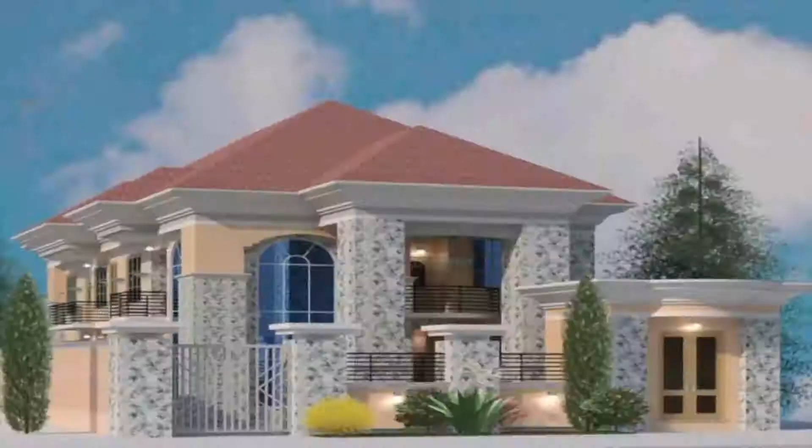Those of the last 3 weeks were rooted by strong winds. Research has also shown that 65% of building collapses occur during the rainy season. Today on the Nigeria Property Show, we will be talking about the need to build right with regular maintenance to prevent building collapses.

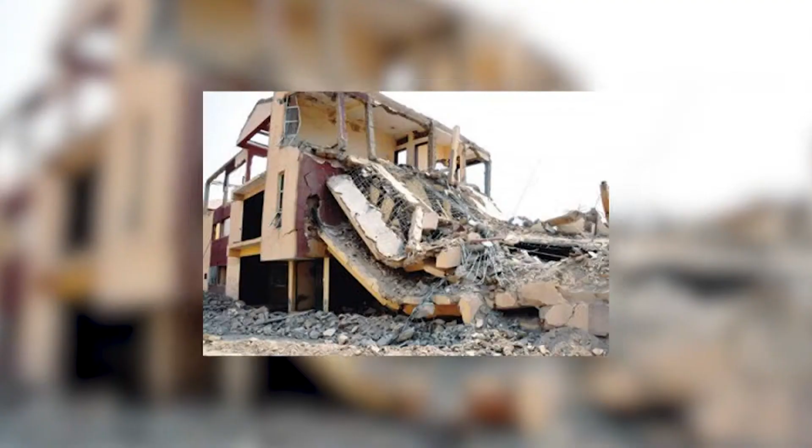Tell us, what should we know when we say we're building right? The collapses witnessed in the past came on during the rains, during the rainy season, and that's what has informed the topic we're treating on the experts on today's program. We're looking at building right towards preventing collapses. What should we do? What should the public know about building right?

You know, the process of procuring a building: you meet with the surveyor. The surveyor gets you your survey document. That introduces the first step. The second step is you go to, if it's a very small property, your architect. If it's large, maybe you want to develop a town or an estate, you go to a town planner to put the layout right.

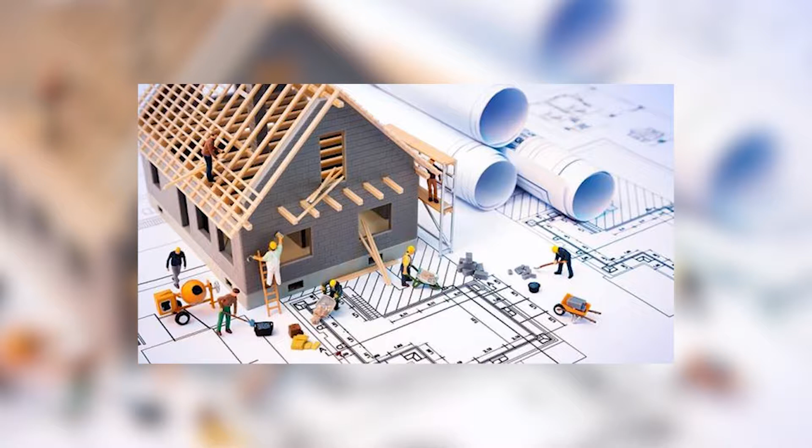The architect now puts the design together for you as it should be. It takes care of the environment, the topography, your needs, your comfort indices, and a lot of things that you need to put together to make that building right for you. It's like when you want to buy a dress, you take it to a tailor to put together for you. But the architect is properly trained in being able to put that building together for you.

Next, the design? The design, yes. Next, the structural drawings are done, like the skeleton of a human being. The engineering of the human system cannot stand without the skeleton. So you need the reinforcement details of the concrete structures and the concrete mixes and whatever to put that design together so that it can stand.

Then a builder builds. And from there, of course, the quantity surveyor will put the cost together. Then your building is right for the market, and the estate value is right for the market.

You said the quantity surveyor will put the cost together, the cost of building materials and all that will go into the building. Then the builder builds, and once the building is finally prepared, it's ready for the market, where the estate valuer puts it on the market.

Where does the soil test come in? What's the significance of the soil test in building right? There's a particular branch of engineering called geotechnical engineering. Geotechnical engineering is where they go into the soil to determine the soil type, what kind of foundation can be used in that soil, to know the bearing capacity of the soil, such that when we put that building there, it will not fail. So it will guide the engineer to know the kind of reinforcement to put in place.

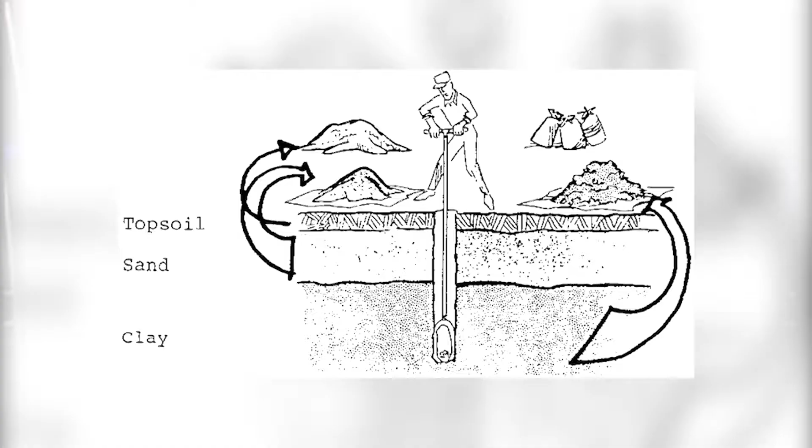What does that soil test have to do with the lifespan of that building, to prevent a collapse in future? Well, there are different kinds of soils. You have the loamy soil, the clay soil, and so on. So the geotechnical engineer examines the soil using a couple of equipments to determine what kind of foundation will be right for that place.

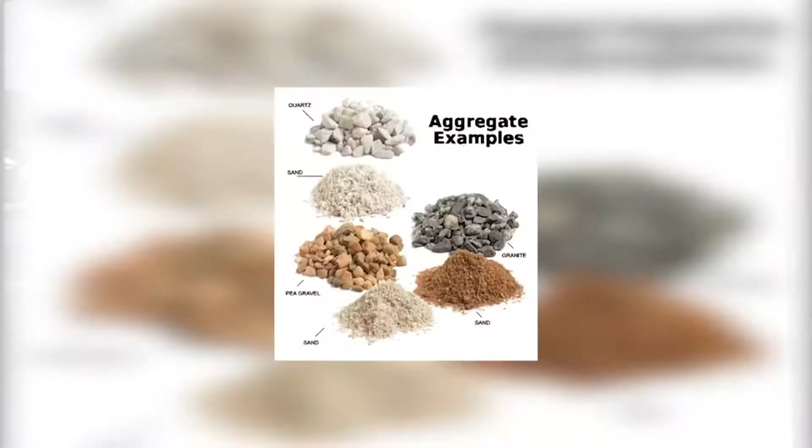This, the structural engineer uses to prepare his calculations and determine the amount of reinforcement, the quality of the reinforcement, the various sizes, and the consistency of the concrete that he has to put in place to form the reinforced concrete, and the blocks where the infill panels will be, where the load-bearing beams or columns will be. So that is the work of the geotechnical engineer, advisory to the structural engineer.

You've taken us through the stages of getting the building on ground. How about maintenance? What has maintenance got to do with preventing building collapses? Well, we hear that every building has its own lifespan. Definitely, there's none that doesn't have an expiry date. Even human beings, we have an expiry date.

But you can keep yourself from expiring early if you maintain properly. So you can keep that building from expiring if you maintain the building properly. Basically, once every 6 months you paint your building.

That's maintenance, so cobwebs will not stand, ants, molds, and whatever will not grow. Grasses that are grasses today can end up becoming trees in 5-10 years if you don't cut them, and the roots of big trees can end up uprooting your foundation. So you have to maintain the environment, you have to maintain the building.

Once in a while, check your roof. Make sure that your roof has cavities, cavities that will not allow pressure to build, because if pressure builds... What does that mean, cavities in the roof?

When you put a roof together on a house, you have to allow air to escape, so you create openings for the air to escape. Otherwise, when there is turbulence, high wind, the tendency is for the pressure to build inside that roof, and before you know what is happening, that roof has lifted off. That's what causes all these roofs to shift.

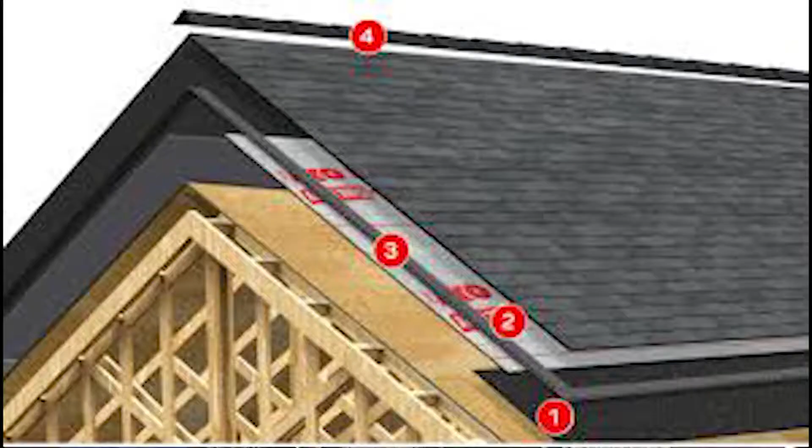Then you have the ones that create turbulence, the ones that follow windy storms, high winds, thunderstorms, and all kinds of rainfall patterns require different kinds of treatment.

The normal driving rain that is coming at an angle may enter your building if your window is not properly done. So your window has to have a window hood that takes into consideration the angle of the rainfall and the wind speed, such that the rain as it's coming in is covered by the rain hood and doesn't enter the house. Once it enters the house, it starts degenerating your structures.

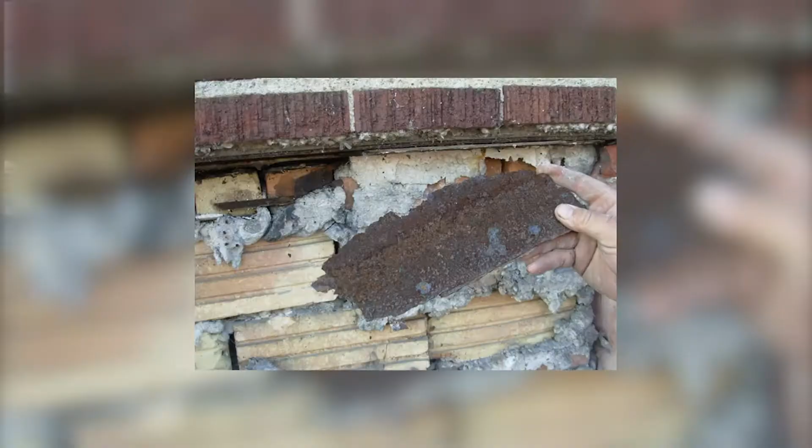Rain in the building can soak into structures and reinforcement begins to rust. So that is one area you have to make sure you take care of.

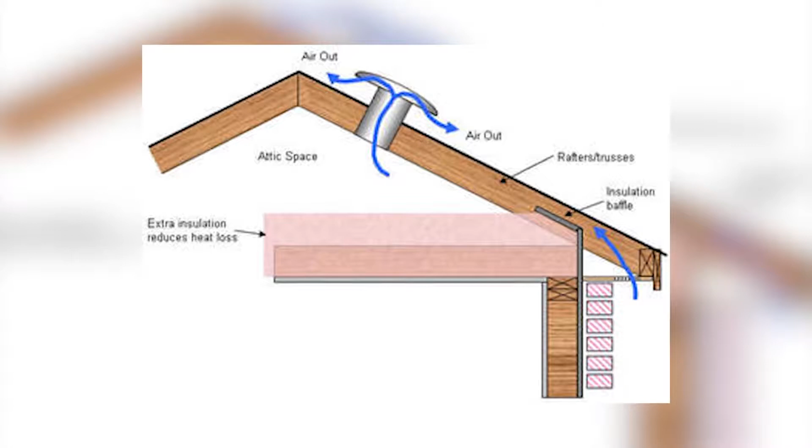As I said earlier, make sure that you create escapes in your roof so that it does not lift off, because if wind comes into your building, it builds pressure inside your roof, and the tendency is for the roof to lift off.

Most of these roofs that you've seen, like Moremi Hall Unilag, the roof got lifted off and landed somewhere in the school, as a result of something like that. So if the roofing structure is weak, the roof will cave in if there is heavy wind.

As the rains are coming now, make sure that your compound, if you see loose holes everywhere, make sure you seal them with maintenance concrete, so that the rain does not seep in.

Provision of housing is at the core of every government's goal. But in doing this, there is an urgent need for a paradigm shift, as done in developed countries, moving towards smart buildings for sustainable development, while pursuing safety for the environment.

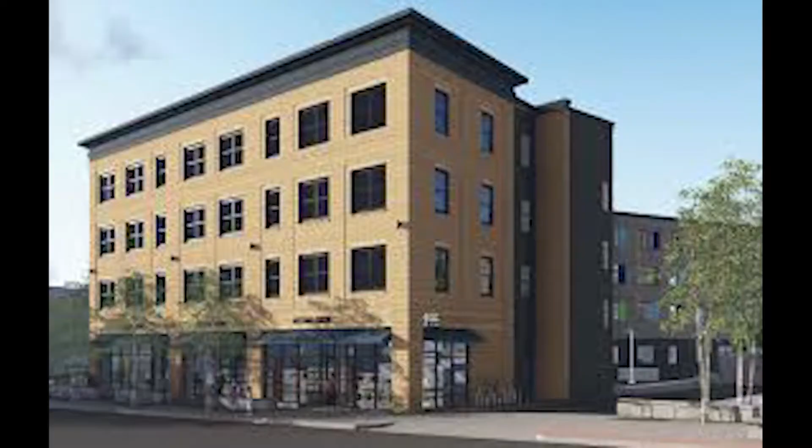Since cities are the future of the urban-built environment, with the increasing population demanding more functionality, the need for smart buildings is long overdue in Nigeria. Nigeria can do that by investing in alternative construction methods.

And in renewable energy alternatives for powering smart buildings, because having a smart building is all hinged on having electricity. For the construction process, for the project development, and for maintenance, you need power. So having a smart building is all hinged on having a good power sector.

So if we can invest in renewable energy alternatives, where buildings are powered on their own, the heating, ventilation and air conditioning systems and lift systems are powered by alternative energy solutions, then we can move towards having sustainable smart buildings and smart cities.

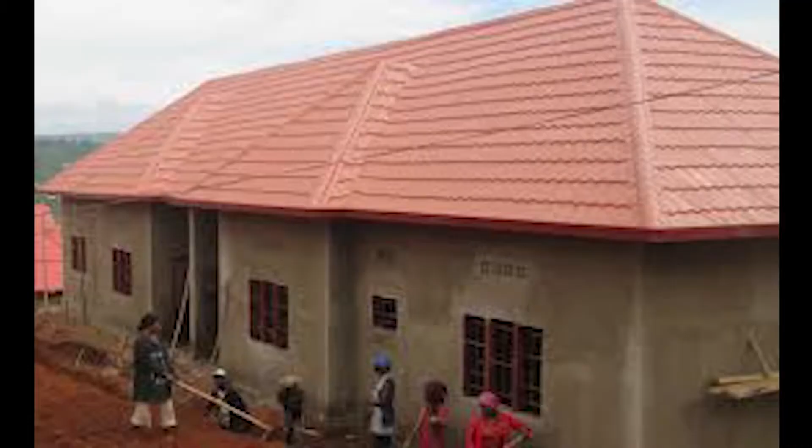A century ago, residential and commercial buildings were just concrete and brick with spaces for electricity and water. But reducing energy consumption, compliance with building regulations, and climate-resilient constructions are the drivers of modern buildings, not just for comfort, but smart metering, smart sensors, and intelligent building materials for high-performance buildings.

As it is, all land in Cairo belongs to government, and the minimum floor you can go in Cairo is four floors. That means with four floors, you will accommodate more people. And if you see the way they construct, it's very, very cheap.

They do frame structures, and the red brick that we have abandoned, that is the mode of construction in Cairo now. It's cheaper to construct, and people will just move in. You will accommodate a minimum of eight families.

So once we have the idea of me building my own house, you building your own house, we must live together, and that's what is making the land more expensive. But once the government owns the land, it must be made available for whoever wants to develop. If it's not for your own personal use, we must discourage individuals building their own house.

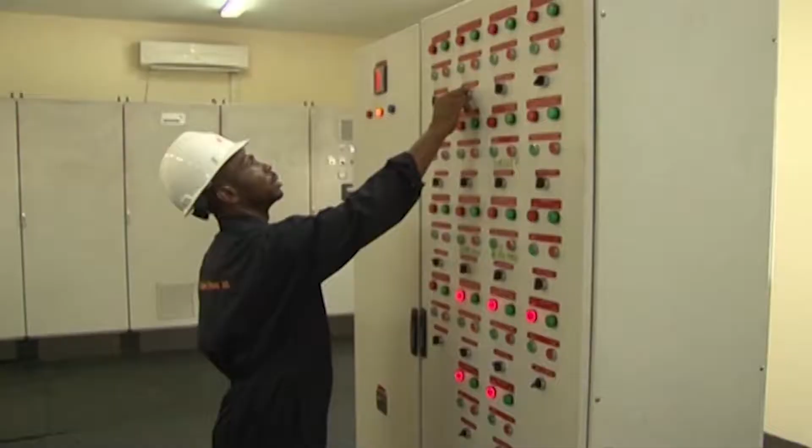Smart buildings could be referred to as automated buildings that achieve significant energy savings to reduce greenhouse gas emissions through the use of improved technologies, climate-smart adaptive materials and structure, electrical systems, and a most sensitive part of construction, smart plumbing. Methods to achieve gradual but steady progress include increased knowledge among the public and continuous research with professionals.

NBRRI has been working a lot on producing alternative building materials and skill acquisition in different areas. There are constituency projects that use skill acquisition. There is mobile housing. There is an effort to bring to the general public the idea of using NBRRI technology to produce mass housing.

There are a lot of other places, like if you get to Jos, if you get to Nnewi, if you get to Gombe and Kano states, even in Lagos here, we have a prototype house at Yaba, which NBRRI has produced, to show that with this, NBRRI can mass produce with its technology to have a lot of houses in the country.

As construction professionals, we should be looking at integrating new, well-researched components into the building process to drive the demand, to drive the patronage of smart buildings, because there is also a cost component to managing smart buildings.

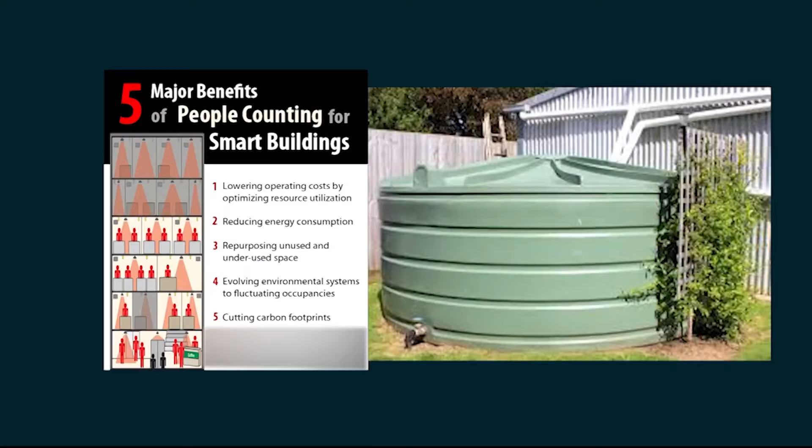Yes. Benefits of smart buildings are all-encompassing to occupants, the society, and the environment at large, with a central sewage system, controlled waste management, and minimal energy consumption, all geared towards sustainable development.